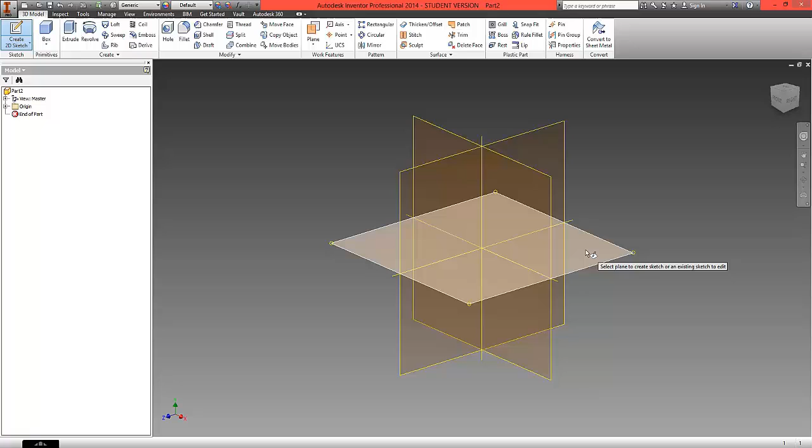Click once and the orientation will rotate round to our 2D view. Select the circle tool from the ribbon, click to the center with the green dot so that it snaps to position, drag out and enter a value of 70 millimeters and hit enter.

Now resize. First of all, what we have is our outside circle, and this is now ready to finish the sketch.

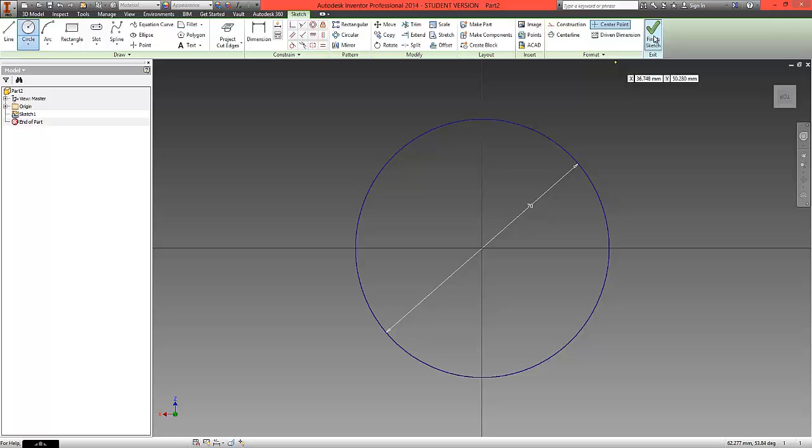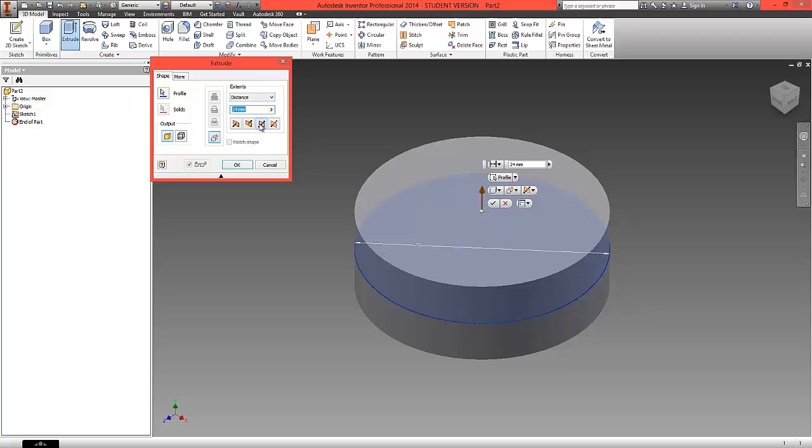We can extrude from the top ribbon or with the shortcut E, and we're going to extrude this part again 24 millimeters in thickness. What we're going to do this time, however, before we select OK, is to extrude symmetrically in both directions, and this will become clear later on. Select OK.

Now that we have our first solid extrusion, we're going to remove material. So what we're going to do now is on the top surface we're going to create a sketch.

Initially, using the line tool, draw two lines in the top left quarter of this circle. These two lines are green because they're not constrained or dimensioned.

Use the arc tool and join these two lines up. Again, not too worried about the dimensions at this stage. Right click and go OK.

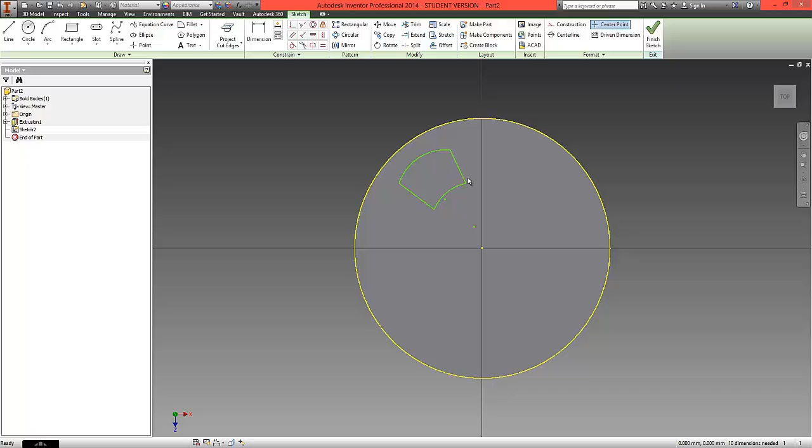What we're now going to do is add some line work to help us constrain and dimension this part. First, choose the line tool from the ribbon and move along to the format options and choose construction. We're going to create two construction lines to the center of this circle.

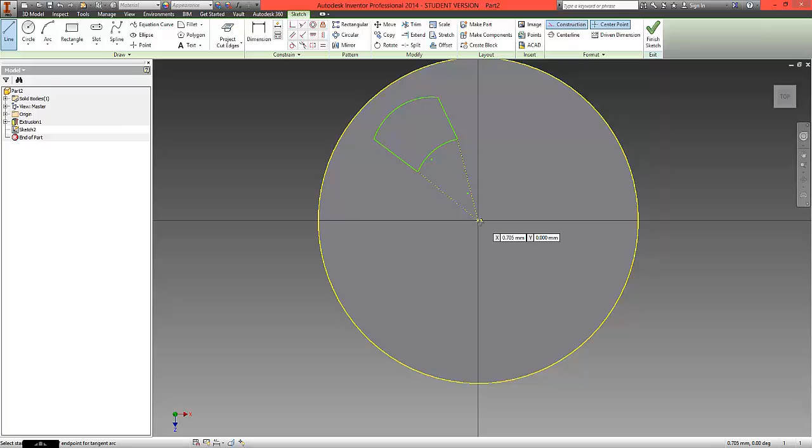As I've constructed here, we now have two construction lines joining our two drawn green lines. Again, using the line tool, we're going to create a third construction line running up the center to the edge of the circle. So now we should have a construction line along the center and two connecting to our drawn green lines.

Why have we done this? Simply, this allows us to make sure that these green lines will directionally travel towards the center, and we're going to use the following constraint.

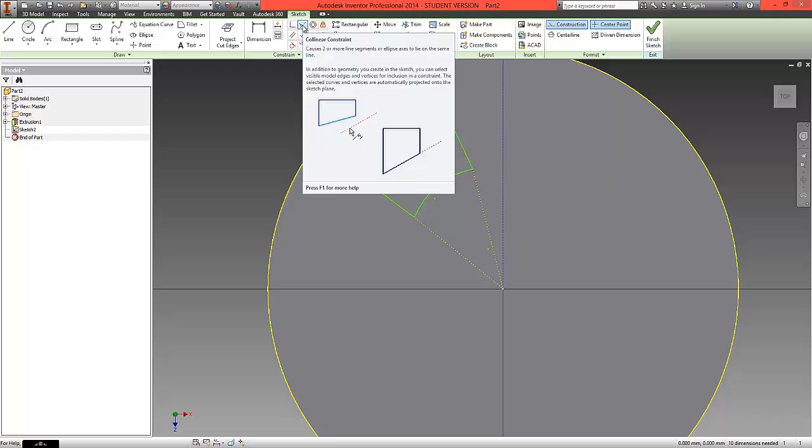We're going to use the collinear constraint. This will mean that when I click this green line and this construction line, the two now run in sync. We do the same here, and we can now see that these lines run to the center. If we now try to adjust any of this line work, the lines are locked towards the central point.

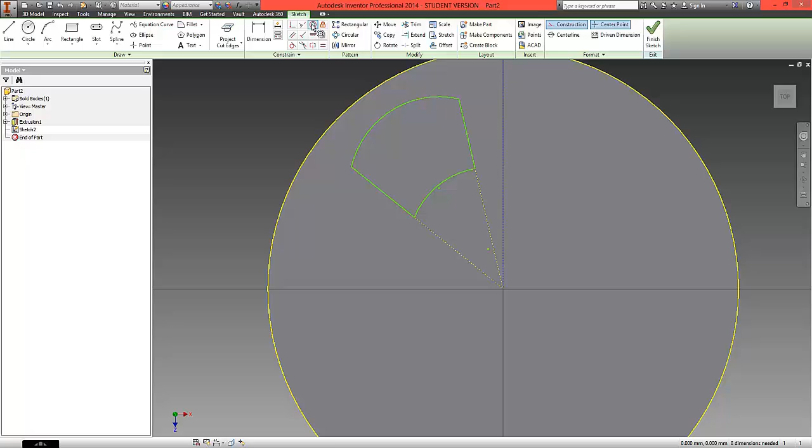What we now need to do is constrain these curves. Using this constraint, which is the concentric constraint, click on the outside arc and to the outside of the circle. This means that this curve will now match the profile of this curve here.

We're going to do the same to the inside arc and the outside arc now. Right click, click OK, and what you'll see is if we drag these points out, the arcs now run parallel to the outside circle. So no matter where we move these points, we now have constrained arcs and constrained edges.

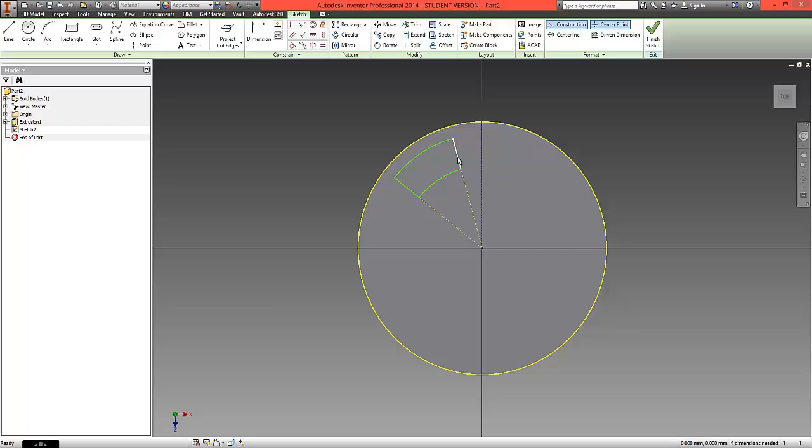What we now need to do is start to add dimensions. We're going to use the dimension tool from the ribbon, and add a dimension from this edge to this construction line that we created. We're going to drag up and enter a value of 30 millimeters.

Our next dimension will be from the construction line down to the exterior edge and drag up. This will measure at 55 millimeters. Hit enter. We've now dimensioned these two positions along the outside perimeter.

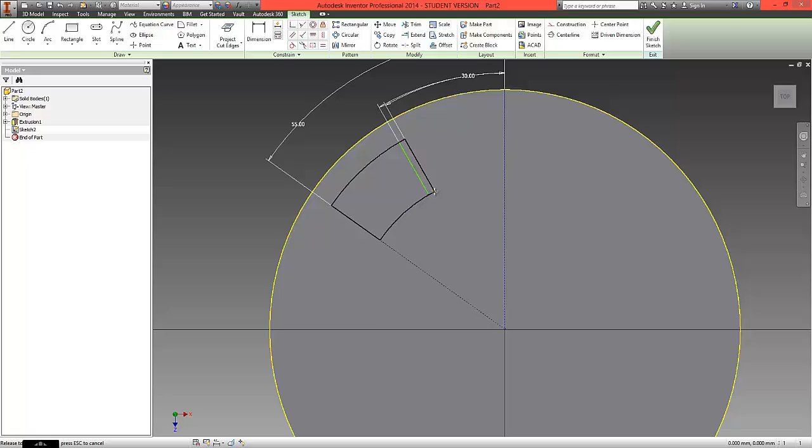What we're now going to do is remove this middle construction line by clicking on it and hitting delete. This now allows us to change the position of this dot here and hopefully modify the shape that we're creating.

Using this tool here under constraints, it's a coincident constraint. We're going to make sure that the corner here and this construction line tie together.

So what we can now see, as we move the line work around, we've managed to constrain and dimension some of the key elements of this line work. With this now in place, we can zoom out.

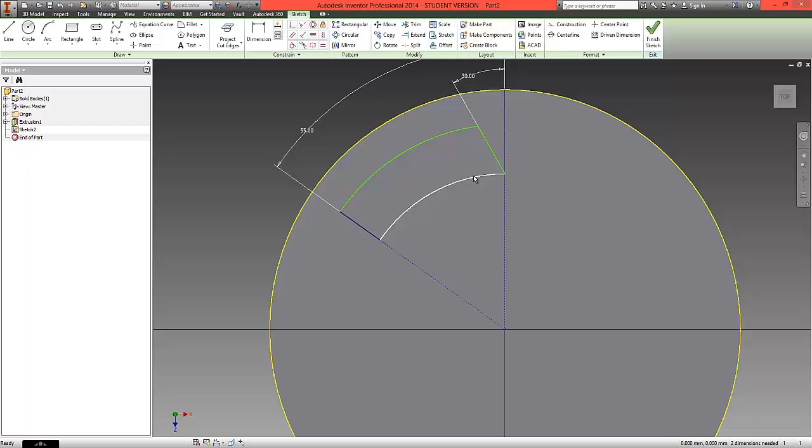Before I can finish the sketch, I need to make sure that all lines are fully constrained and dimensioned. At present, the only line that is constrained and dimensioned correctly is this blue line here. The green lines are not completely dimensioned or constrained yet.

So I'm going to choose the Dimension tab from the ribbon, click the outside arc, drag out and set this to a dimension of 30mm, hit enter. The inside arc I'm going to click and drag out and set this to a dimension of 20mm and hit enter. What you can now see is that the line work has turned to blue, which confirms that it is completely constrained and completely dimensioned.

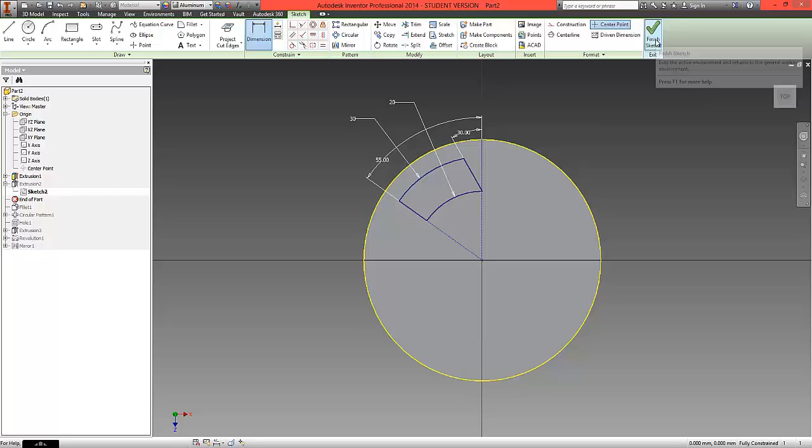We can now finish the sketch. With our sketch now complete, we're going to use the extrude button and choose the profile of that cut.

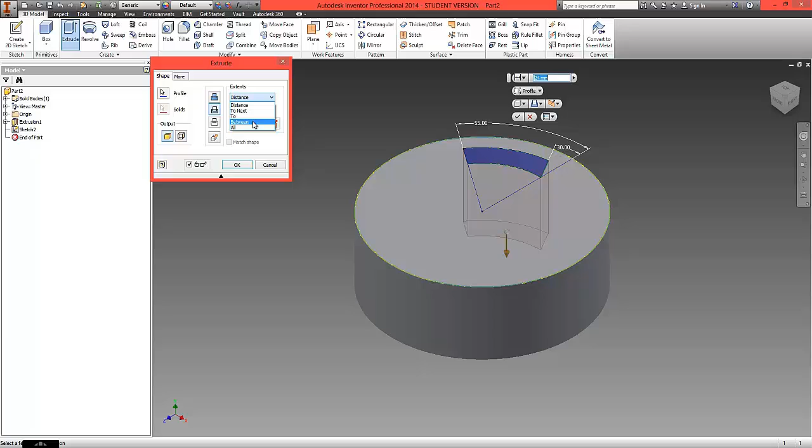We're going to choose to remove from the pop-up box, which is the second option down, and the distance will go all the way through the model. Click OK. We've now created our first hole through the wheel.

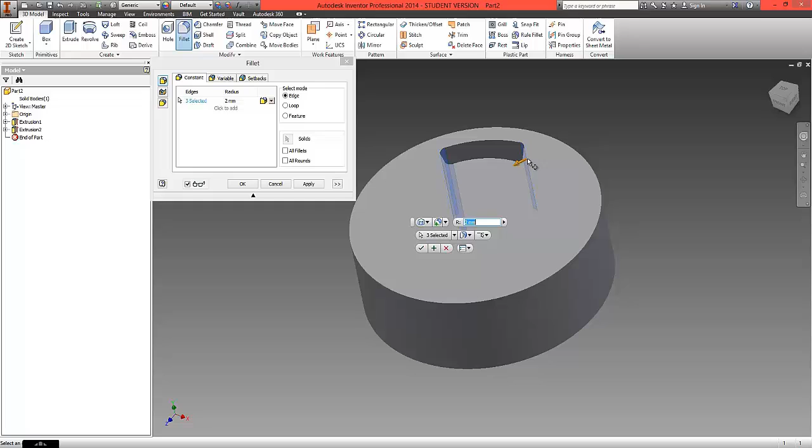At this stage, it's worth applying a fillet from the top ribbon of 2mm to each of the internal edges of that cut. As you can see in the preview here, we've now rounded those corners off.

Click OK. With our first hole, we're now going to create a circular pattern to create the final holes around which the wheel will be constructed.

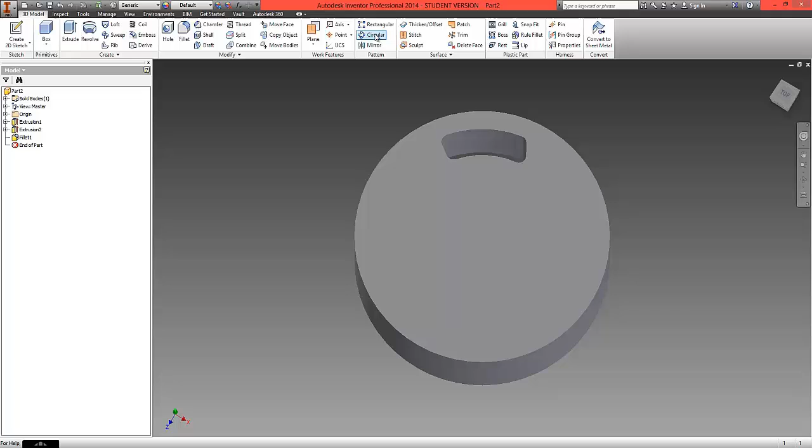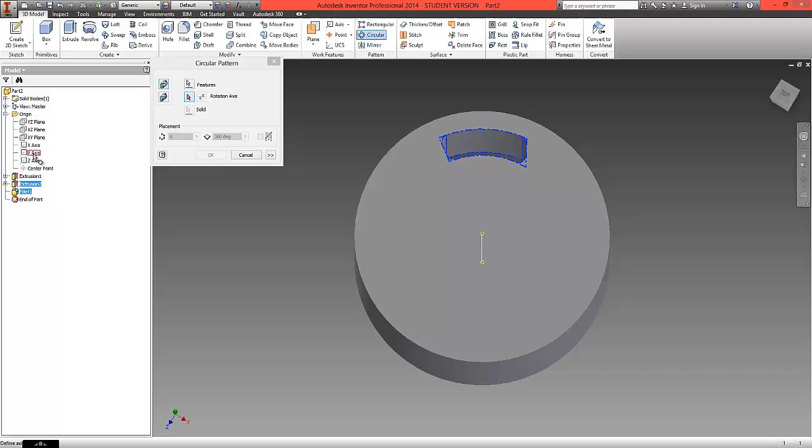From the top ribbon, under Pattern, select a circular pattern. Under Feature, select both the hole and the fillet by clicking twice, and for the rotation axes, on the left hand side under Origin, scroll down through the X, the Y and the Z axis and choose which is the appropriate. In this instance, the Y axis is the most appropriate.

What we now have is a preview of the pattern we're about to create. Under Placement, we can change the number of cuts we're going to create, but in this instance 6 is correct. So we're going to click OK. We now have 6 corresponding holes which now create a pattern on our wheel.

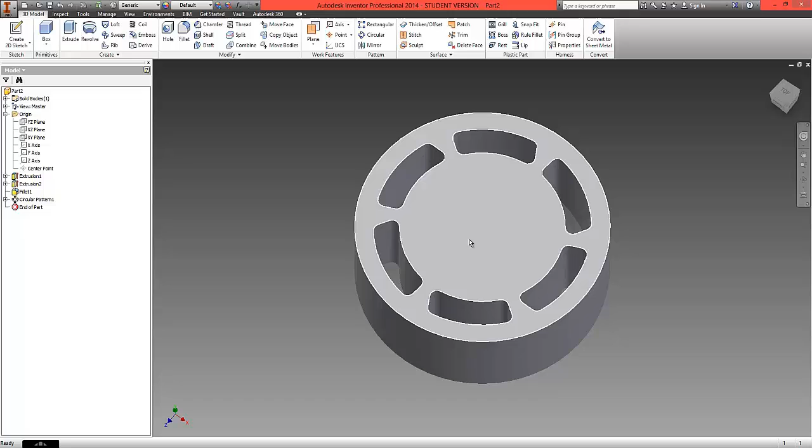Having done this, we're now going to create a hole down the centre onto which the axle will spin. On the top ribbon, choose the hole option.

Click onto the surface and you'll see instantly a preview of a hole appearing that is 3mm. What we're going to do is increase this hole to 22mm.

For references we're going to use the first reference only. Click on it from the pop-up and we're going to reference the outside edge of the wheel. What this has done now, it has centered within the outside perimeter the hole that we're cutting.

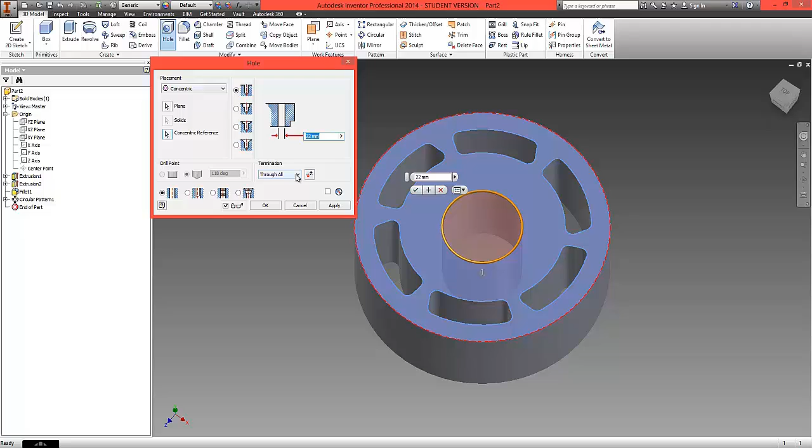Again, make sure that we're going all the way through the part and click OK. We now have a hole through the center of the wheel.

Next, we're going to create a slight recess within which we're going to fit some bearings. To do this, on the top surface, we're going to create a sketch.

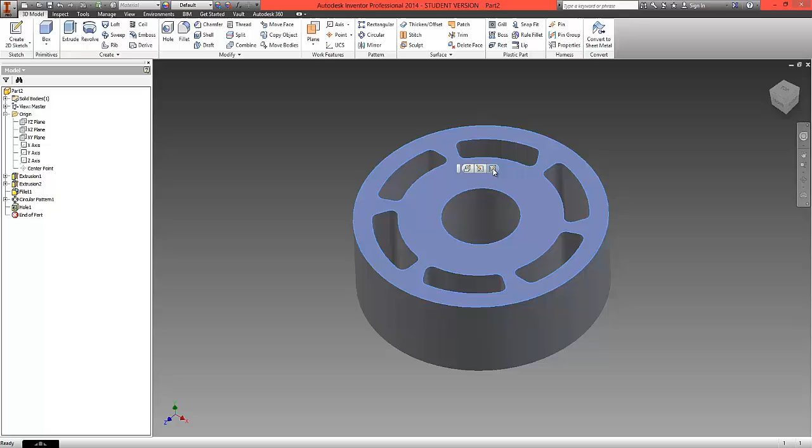Use the circle tool as we have done previously, and this time draw a circle from the center that is 30mm in diameter, hit enter and finish the sketch.

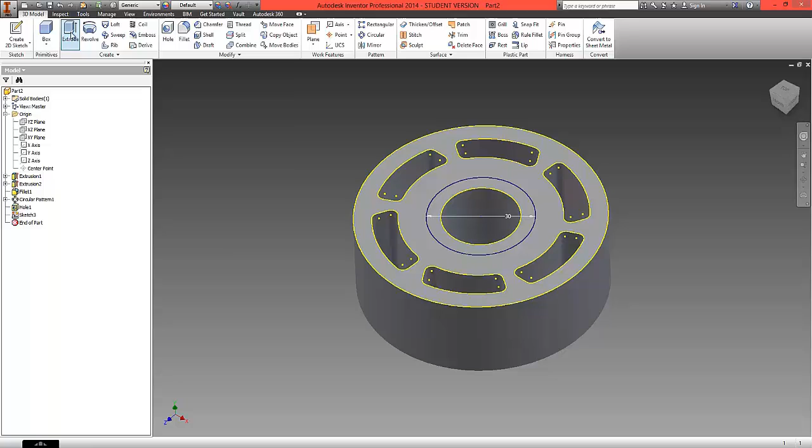This time we're going to use the extrude tool, select which we're going to remove, choose again to remove the material, and this time enter a value of 10mm. This will mean that we don't cut all the way through.

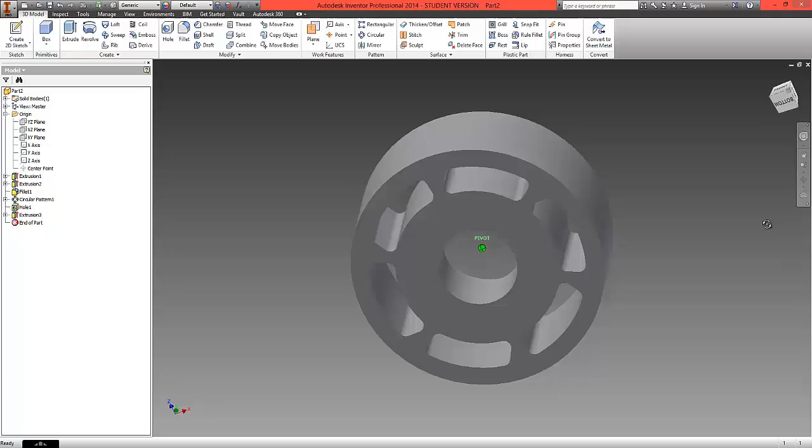Rather than flipping over the wheel to draw a second hole and cut a second hole into which a bearing will fit, what we're going to do in this instance is actually mirror that first feature.

So under pattern there is the option to mirror, select mirror, and now choose from the left hand side or from the model the feature which you want to mirror. In this instance it's my extrusion 3 which has created the cut.

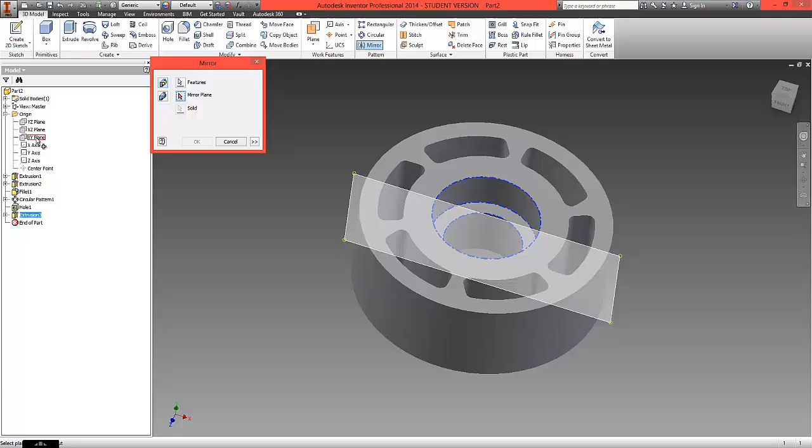In the mirror plane, from the origin options we have a YZ, an XZ and an XY. In this instance what we want to do is we want to mirror in the XZ plane, and when we click this, as you can see, this is the central plane.

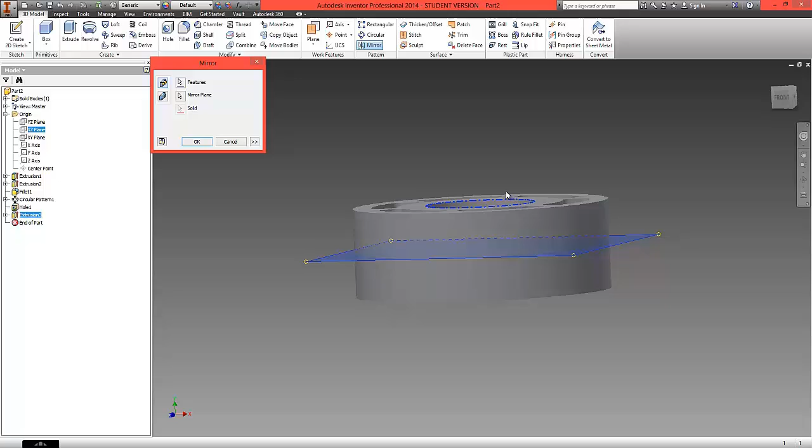This brings us back to the first part where we created the extrusion and extruded it in both directions. Now we can use this central plane to mirror features from the top onto the bottom of the wheel. Select OK, and on the other side we should see a corresponding hole mirrored on both sides. One of the final features we're going to create is a revolution, which is also a cut.

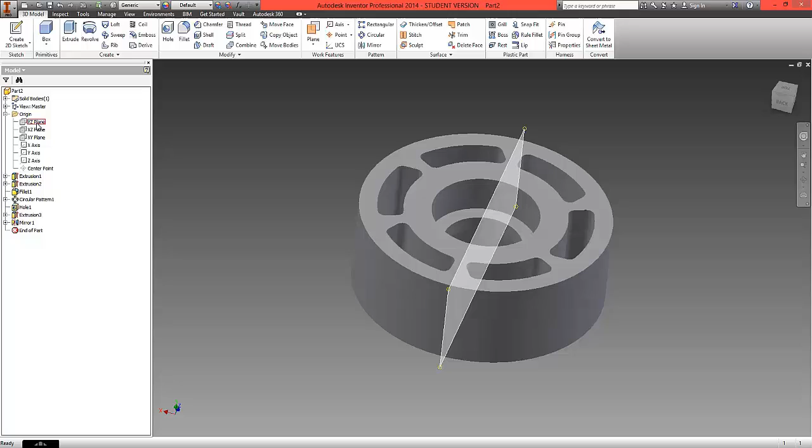To do this, we're first going to locate a datum plane onto which we can create a sketch. In this instance I'm going to choose the XY plane. Choose from the ribbon to create a sketch, and this time we're going to choose from the ribbon under project cut edges.

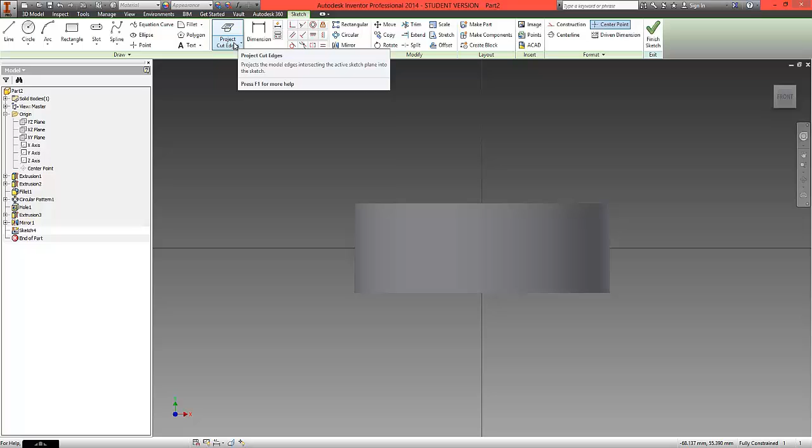We'll make sure this option is selected, and as you can see some line work has now appeared. Under the top tabs we go to View, and under Visual Style we're going to look at the model as a wireframe. Now we can see yellow line work showing where some of the patterned cuts we created earlier are. We can also see how we've cut in for the bearing on each side, leaving that central cut of 22mm for the axle.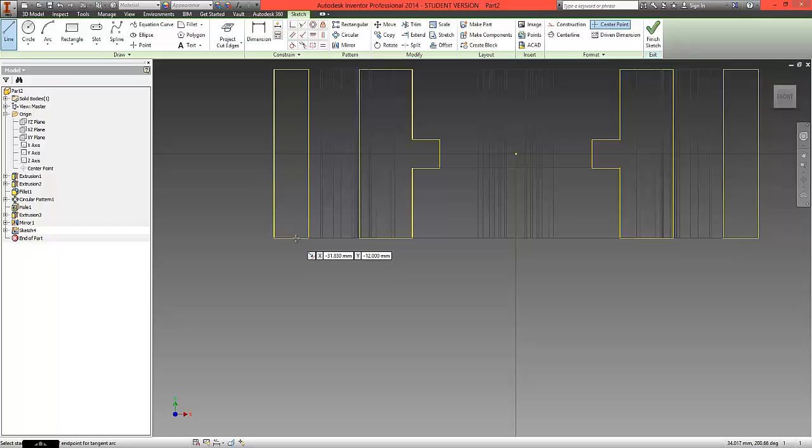Moving back to the sketch along the top of the tabs, we're going to create a line and drag across. Right click and click OK. This small line is then going to have an arc created from one point to the next, so click from one edge of the line, drag across, click to the other edge of the line and drag up, entering a value of roughly 15mm.

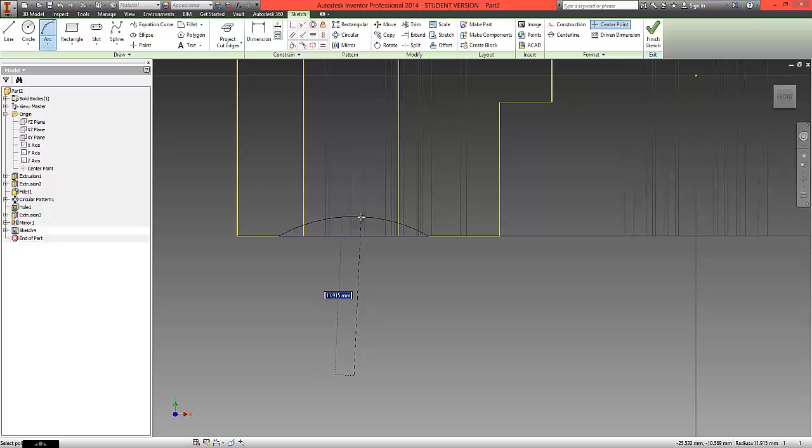To do this, choose the dimension tool from the ribbon, click on the arc and drag down. Click again and enter a value of 15mm. This sketch is now complete, so finish the sketch.

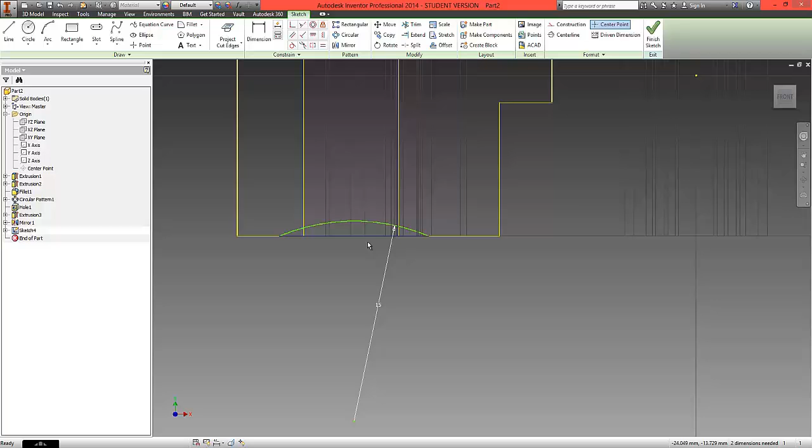As you can see, we now have a very small arc, a semicircle, which we're going to revolve to create a cut onto the surface. Choose the Revolve option, or the shortcut R from the keyboard, and under profile choose the small arc shape we've just drawn, shaded here in blue.

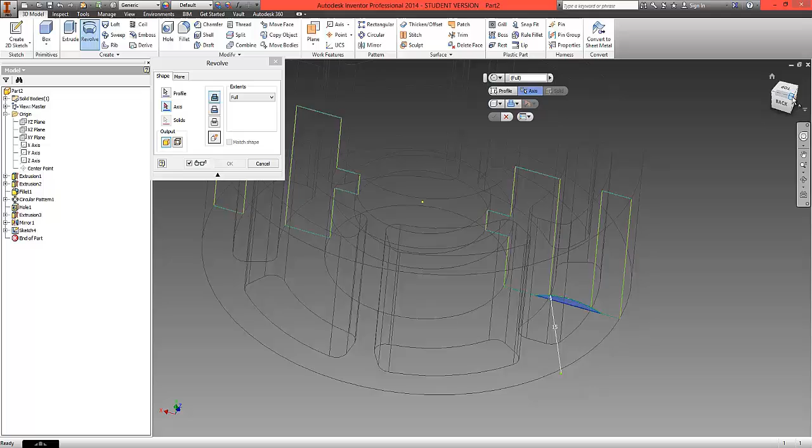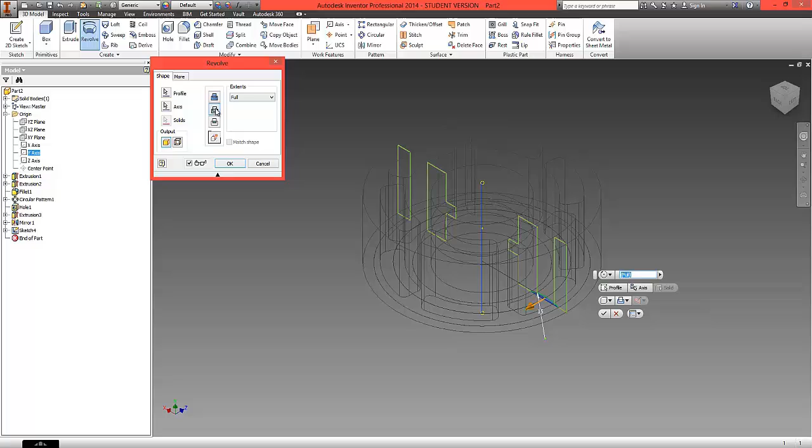For the axes, we need to find a suitable axis from the left hand side around which we can spin this profile. At the moment the y-axis seems most appropriate, so I'm going to select the y-axis with one click. I'll now click to remove the material option, the cut option, from the pop-up, and when we click OK, at the moment we can't actually see what has been achieved.

So we're going to return to the View tab at the top. Under Visual Style I'm going to change it to shaded view, and now when I spin my model over, as you can see we've created a semicircled cut onto the top surface.

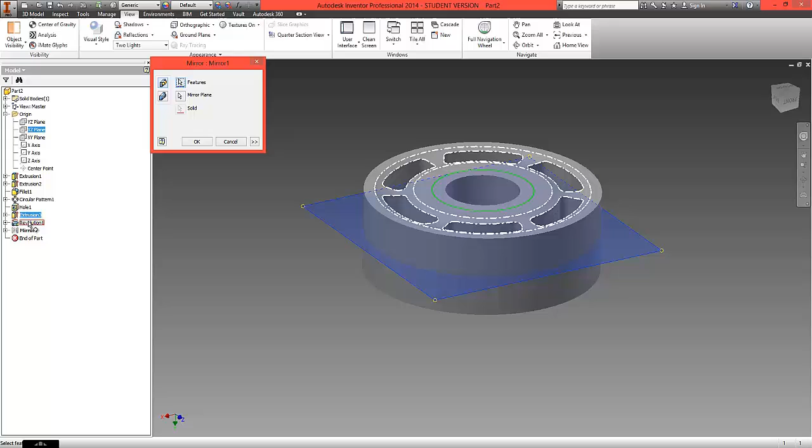In the model tree on the left hand side, if we now take the mirror option and drag it below the revolution we've just created, we've changed the order in which things happen, but the model still remains the same. If I now right click on the mirror and choose to edit the feature, I can, under the features option, click and add the revolution feature, or add it by clicking in the model tree. If I now click OK, I've added the new feature so that it now appears on both sides.

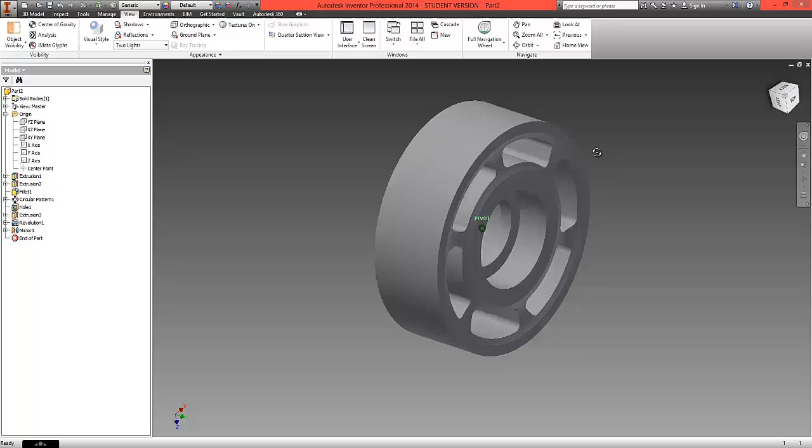So we now have both the internal cut for the bearing and the revolution on the surface mirrored about that central work plane. Our last task before we move out of this file is to return to the model tree on the left hand side.

Right click and choose iProperties. Under the Physical tab, we're simply going to apply a material suitable for this part. In this instance, moving from a generic material, we're going to choose an aluminium. So we'll choose the first aluminium in the list and select Apply, which will now apply the physical properties and the appearance properties.

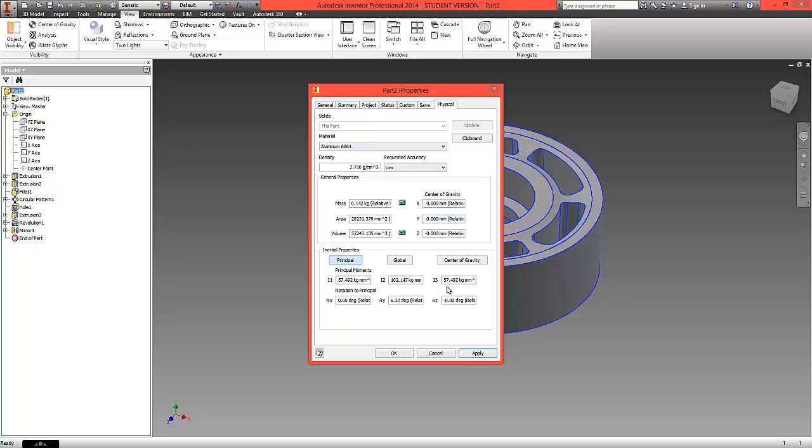And when we return to our model, we can see that it has now been rendered very quickly in aluminium, and this part now has those matching properties.